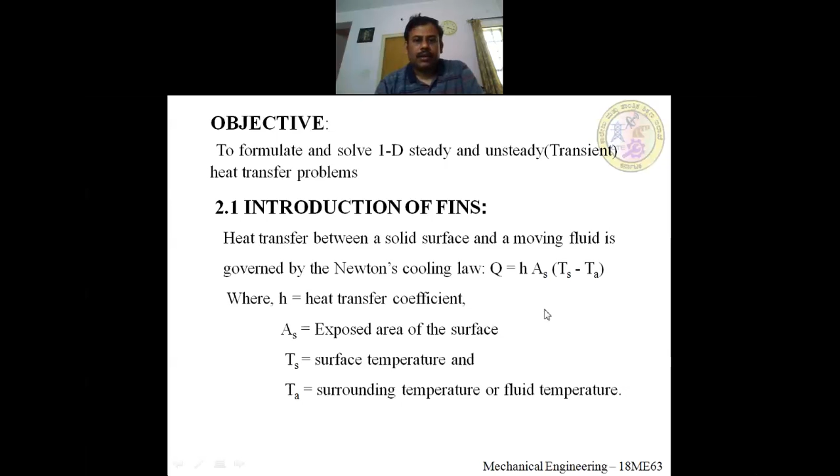Now what are fins? Fins are protrusions, extended surfaces from the base surface into the cooling fluid, so that the extra surface of the protrusion is also in contact with the fluid. So we increase the surface area by adding fins. These fins will be either extruded or welded to the base surface, so that the surface area increases and the heat transfer rate thereby increases.

Some of the applications of fins: fins are put around the cylinder in bike engines, and in car radiators, on the outside tubes, so that heat transfer will increase. Fins are also used in heat exchangers, electric motors, and generators. These are some of the applications of fins.

Coming to the types of fins. Generally there are two types of fins. A straight fin or spine is an extended surface added to the plane wall. Another one, the annular fin, is attached circumferentially to a cylinder to increase its surface area. Depending upon the cross sections, the naming of the fin will be done.

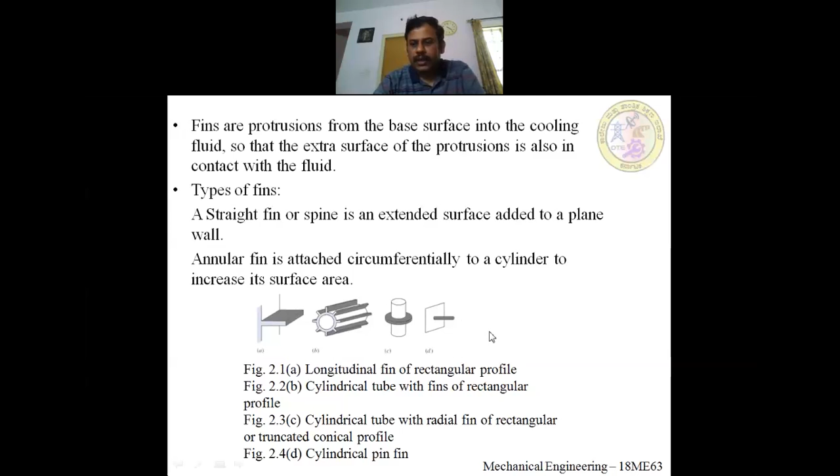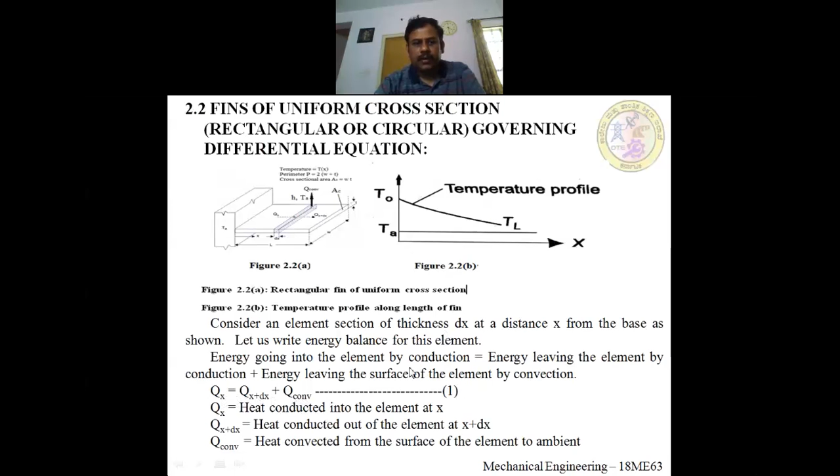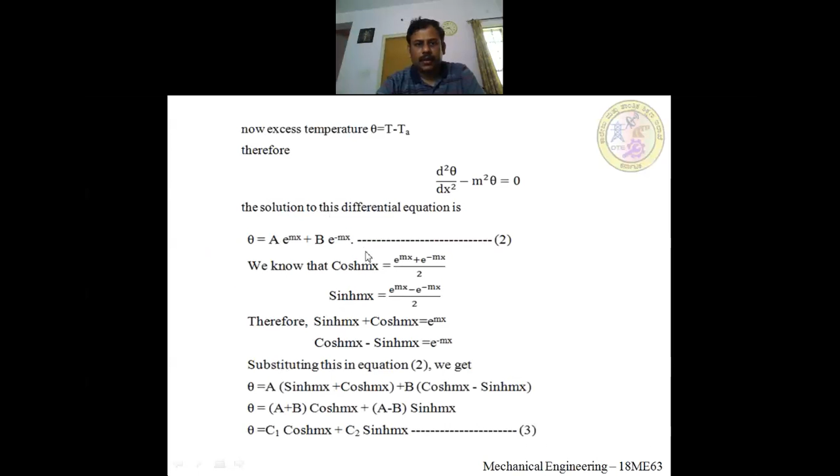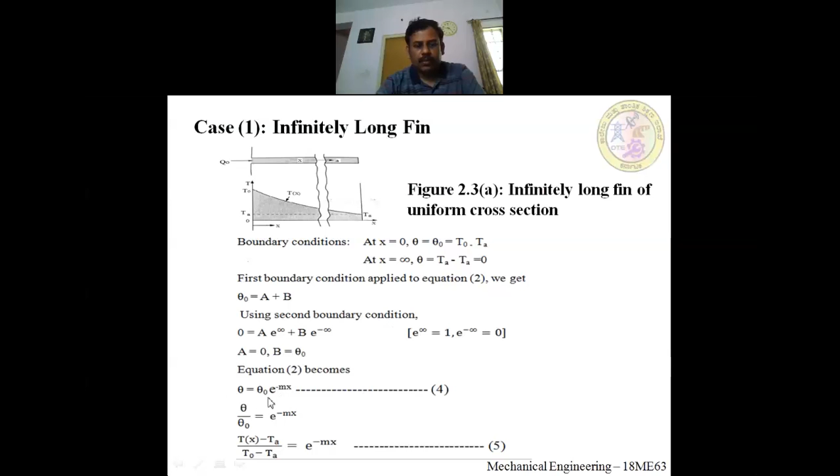So, differentiating equation 4 with respect to x. Where is equation 4? This equation 4 I am going to differentiate with respect to x. What are you going to get? d theta by dx at x equal to 0 we are going to apply.